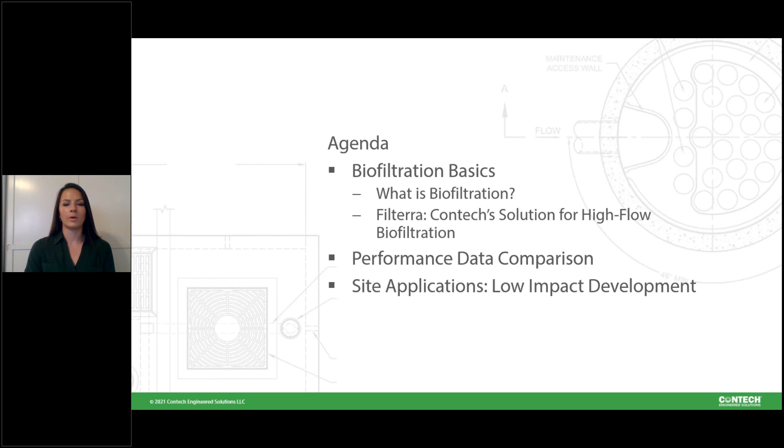So specifically, what is biofiltration and how does Contech's Filterra system fit within the biofiltration niche? After that, Vaikko Allen will take over and discuss the proven performance of Filterra in comparison to traditional biofiltration. And finally, Alex McLeod will finish it off with some Filterra designs that will help you meet your low impact development requirements for your site.

We would like to start off our Filterra webinar with a quick poll question. Please select the term on the right that you think best represents the image on the left.

I'll give you a couple minutes to look at the picture. And then here's our poll. Please select bioretention, biofiltration, rain garden, or bioswale.

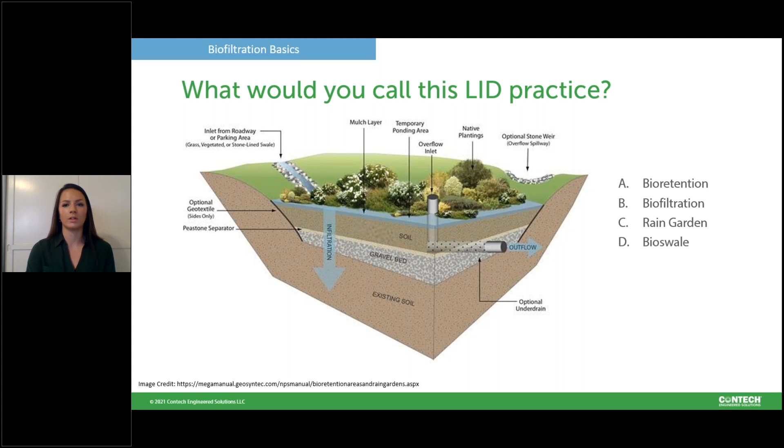Thanks, Jill. So the point we would like to make here is that a lot of these terms are used interchangeably depending on the region you live in. We encourage you to look at your local permits and technical guidance manuals to determine the appropriate terminology for your region. This may be dictated by the absence or presence of an underdrain in the system, but for the sake of this presentation, we will be using a lot of these terms interchangeably and wanted to make that denotation.

So what is a bioretention or a biofiltration gallery? It is a pollutant control mechanism that incorporates physical, biological, and or living processes via vegetation to capture, immobilize, and treat harmful pollutants. Without biological processes provided by the plant, the unit will not be as efficient in nutrient removal and metal uptake and should be termed a media filter, which does not meet the LID requirements of many regions around the country.

To further display where these physical and biological processes occur within the biofilters, we will talk through them step by step during the storm event. Physical filtration first occurs in the mulch layer, which is depicted by number 1 in this diagram.

This is where heavy sediment and debris are captured and retained, and then finer treatment occurs in the media, which is depicted by number 2 in the diagram. Pollutants are trapped through physical impact with the media particle, whereas dissolved pollutants are also captured in the mulch and media through physical and chemical processes.

The chemical makeup of the media allows for adsorption of pollutants, such as phosphorus, in the form of phosphates that are chemically attracted to the soil components via adsorption. Dissolved metals are removed through cation exchange reactions within the mulch and media.

Moving on to the biological processes, the plant introduces a diverse ecosystem to the filtration bed. After the storm subsides, microbes and other organisms housed in and around the plant roots biodegrade various pollutants captured in processes 1 and 2. This is depicted by number 3 in the diagram.

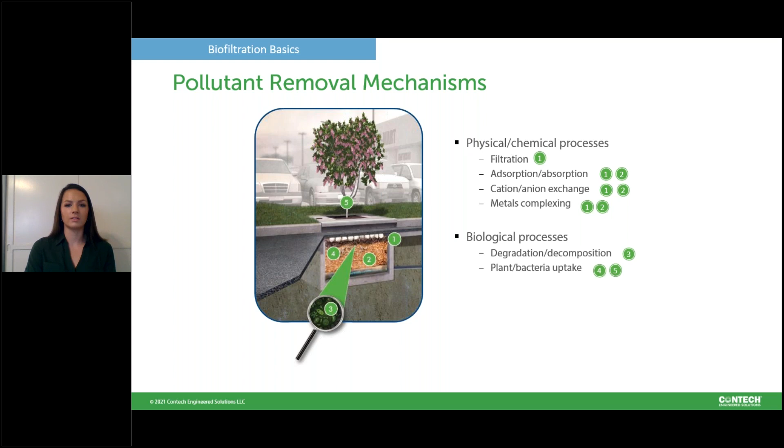Through this process, the pollutants are transformed into soluble forms that the plant can utilize. The act of uptaking these pollutants from the reaction sites in the media opens up that site for use the next time it rains. This renews the media capacity, allowing the plants to use the nutrients for growth and bioaccumulating the heavy metals, as seen in 4 and 5 on the diagram on the left.

Really driving home the importance of vegetation, the plant is crucial to maintenance. The roots keep the pore space open in the media over time and provide long-term shelter, as well as an organic food source for organisms doing the heavy lifting and regenerating the media's capacity.

As the plant grows, the roots facilitate a more robust ecosystem, which provides more uptake, as well as some of the evapotranspiration of the stormwater flowing through the system. It is a symbiotic relationship.

We need the plant to facilitate the biological activity in the media and to renew the media in the system. The plant needs water and nutrients to grow. You cannot have one without the other.

If the system contains no plant, or the plant does not interact with the area of the media through which the stormwater flows, the media regeneration cannot occur.

Likewise, if the stormwater does not reach an elevation in the system for the plant to access it, the plant will not live. If the maintenance of the system is not performed, so in the case of Filterra, the removal and replacement of the media, the system will be in bypass and the water will not reach the plant.

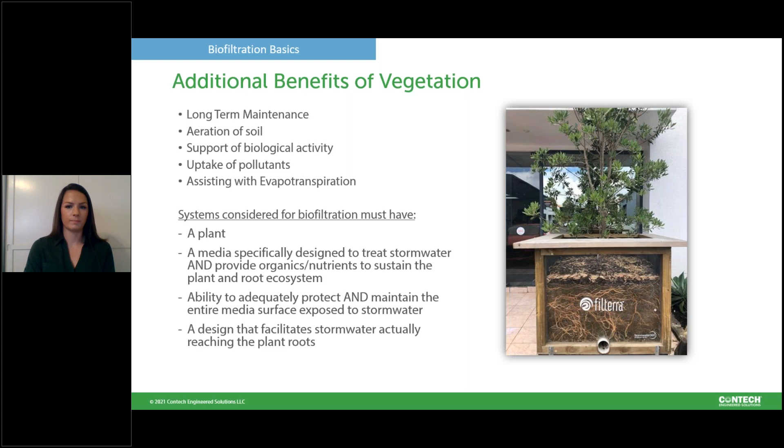So in addition to the plant, what makes up conventional bioretention? Its media typically flows at 1 to 12 inches per hour, depending on your local jurisdiction or requirements. It can take up a decent portion of the drainage area for your site, and it's typically designed by an engineer, sourced and installed by the contractor, and maintained by the landscaping crew.

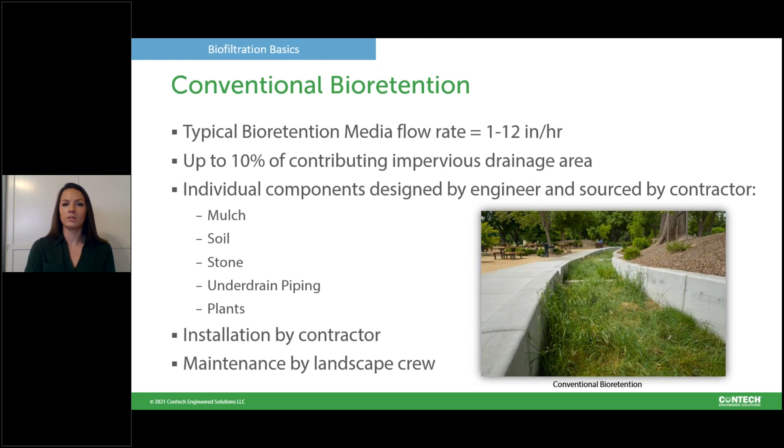Its basic components are mulch, soil, stone, under-drain piping, and plants. But how does Filterra bioretention differ from that of conventional bioretention? You still have the plant, mulch, media, stone, and underdrain.

However, our soil is a proprietary media that's been engineered to flow at 100 to 175 inches per hour. What media infiltration rate we use will depend on the local jurisdiction the product is being installed at.

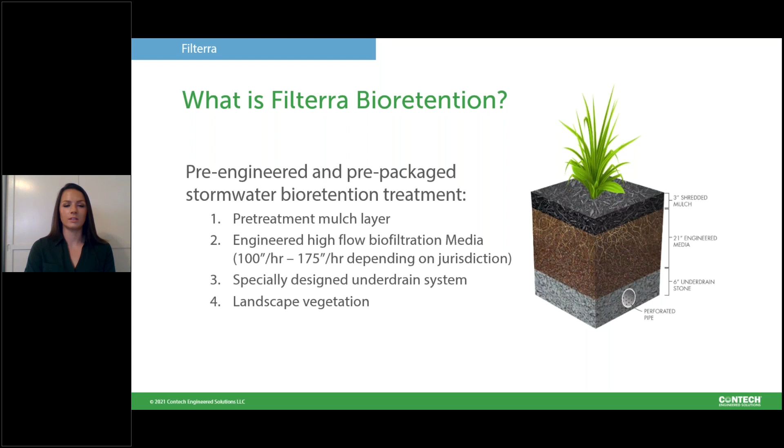Due to this higher media infiltration rate, the Filterra has a much smaller footprint than that of conventional biofiltration. This frees up a lot more usable land on site, which can be a game changer on sites where the cost of land is steep, like California.

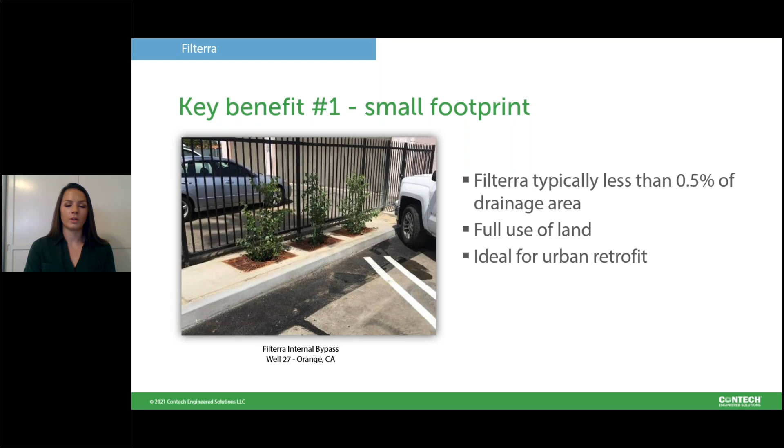There's a lot of versatility to our units to accommodate fitting them in any site. Our most basic and cost-effective design is our offline unit. This can have a curb or a pipe inlet and requires the use of a diversion structure.

If you cannot accommodate the use of a diversion structure, we would recommend using one of our internal bypass curb models or the peak diversion. The peak diversion are for those sites with a slightly higher peak storm event because it has an inlet chamber and an outlet chamber separated by an internal weir wall to increase the capacity of that internal bypass.

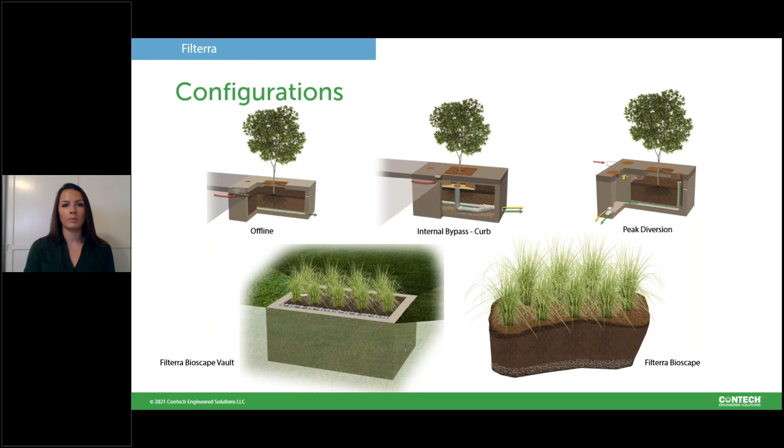If the owner or architect is looking for a more aesthetic option, we do have the Bioscape Vault. This still has a precast in place, however, it's open top, so it's a little more pleasing to the eye. If no precast is desired whatsoever, you can pursue the Filterra Bioscape, which is essentially a Filterra in a lined trench. This unit is ideal for those areas that need multiple vaults or just a large media surface area. Both of our Bioscape vaults also have internal bypass capacity.

Another benefit of the Filterra system is that you're getting a prepackaged design that just needs to be set and backfilled by the contractor for our typical vaults. Our media batches are rigorously tested and quality controlled to keep performance consistent versus media mixed on site by a contractor to meet an engineer spec.

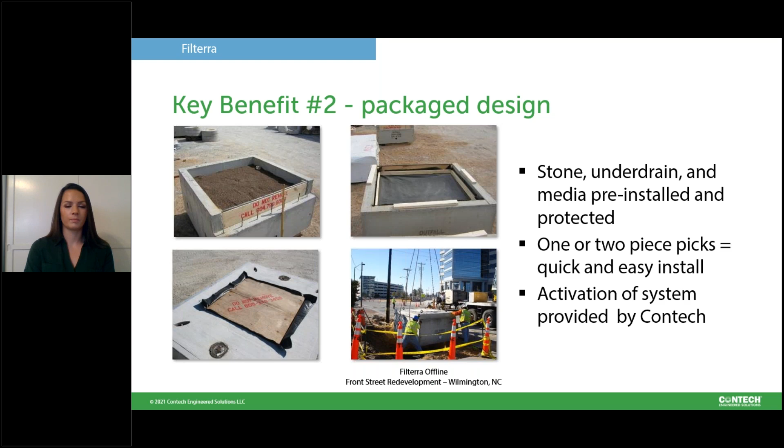Once the site is 90% stabilized, they can call the number boarded up on the Filterra to complete the activation. At the time of the activation, you'll receive your first maintenance event. The first year of maintenance is included with our Filterra system. At this time, they'll ensure the proper installation of the tree. So we want to make sure that a lot of the soil from the plant's root ball isn't mixing in too much with our proprietary media. And we'll also place the top 3 inches of mulch and replace the tree grate.

A secondary visit is performed about 6 months after that to check on the livelihood of the plant. We want to make sure that it is either being irrigated in dry areas or that it's seeing enough stormwater to help it thrive. At that time, we will remove any trash, debris, and the 3 inches of mulch and replace the 3 inches of mulch on top.

After the first year, the unit should still be maintained every 6 months. The mulch can be sourced locally per our mulch spec, and there is no confined space entry needed to maintain our units. So virtually anybody should be able to do these. However, if the owner so wishes to, they can go on our website and get a quote from any of our third-party certified maintenance providers in their area.

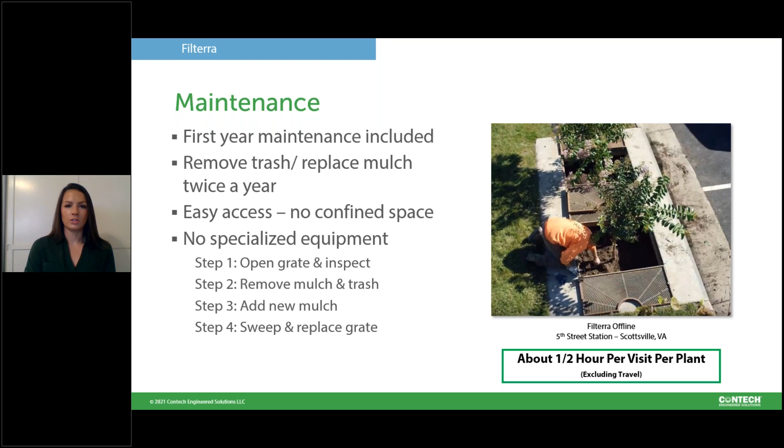I will now be handing over the presentation to Vaikko Allen to start our discussion on key benefit number 3 of the Filterra, which is its proven performance.

And while we're switching presenters, we've had a couple great questions come in, so I'll just ask them now. The first one is, can you place Filterra in a raised planter? The Filterras can be placed above ground. They just require an additional structural calculation. Thank you. And then one more question. Do you need to replace the media when you replace the mulch during maintenance?

Yeah, so piggybacking on the last one, you can also put a Bioscape in a raised planter as long as it meets our certain requirements. And we actually have our media tested out 15 to 20 years, and it should not need to be replaced if the mulch is adequately and properly changed every 6 months to prevent any occlusion within the media.

Great, thanks Tamara. Vaikko, take it away. Great, thank you.

Good morning, everyone. So yeah, we're going to talk about performance here for a few slides. It's been over 15 years since Filterra was initially conceived in a laboratory, and we've been testing it really since then, both in the lab and in the field. At this point, we have 6 independently verified full-scale field studies. And the purpose of those studies is mainly to evaluate the water quality performance of these systems.

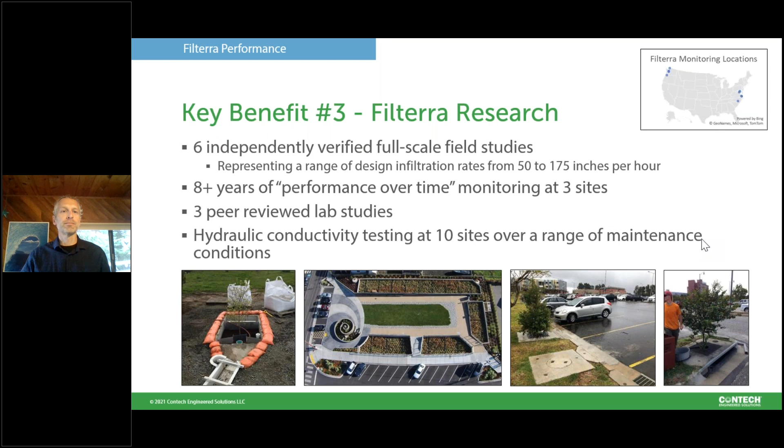So at this point, the premier field monitoring protocol is the Washington Department of Ecology TAPE program. They've established a technology assessment protocol, Ecology, otherwise known as TAPE, which is really a guide for evaluation of stormwater treatment systems in the field. And the Washington Department of Ecology has set up some very specific performance standards that must be met in order for treatment systems to be used in that state.

And if systems are tested following the protocol and meet those standards, then the ultimate goal or endpoint of the program is to get a general use level designation for the technology in the state for the specific pollutants. There are pilot and conditional use level designations available as well for technologies that maybe have a little bit of lab data or a little bit of field data, but haven't quite followed the TAPE requirements.

So I bring that up just because I want to reinforce that it's important to look for general use level designations from the Washington Department of Ecology to really indicate that a technology has made it all the way through the testing process and has been approved.

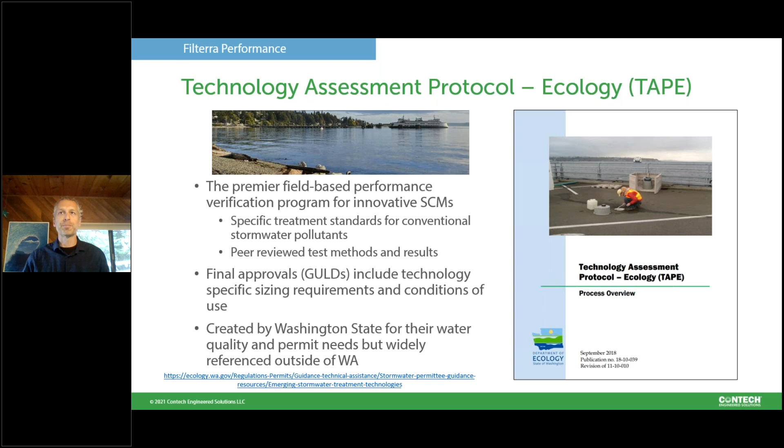For example, for TSS, we're looking at basically between 20 and 200 milligrams per liter. The reason that those are set is so that the data that's collected is relatively representative of typical stormwater conditions. So in other words, we don't want to, for TSS, for example, be sampling water that's 1,000 or 2,000 milligrams per liter coming in, because that just is kind of an outlier or in the very high upper range of what you might expect for TSS concentrations. And it's actually much easier usually to get high removal efficiencies. So these influent concentrations are somewhat constrained to focus the research into typical conditions.

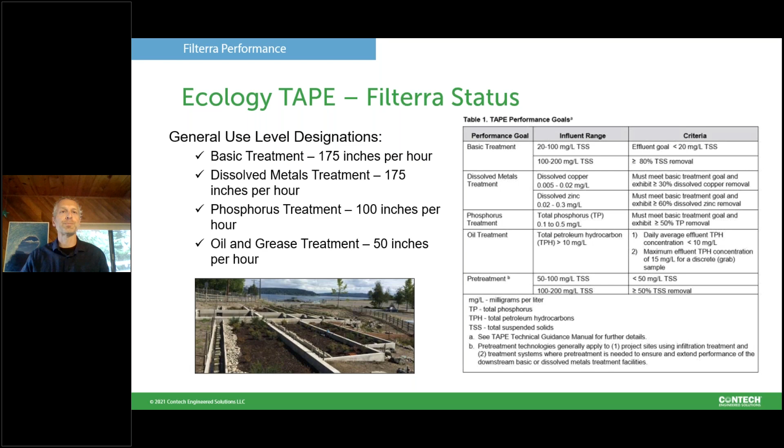In the laboratory, the premier testing program is the New Jersey Department of Environmental Protection. Here they have a lab-based testing protocol that requires the use of a manufactured silica product with an average particle diameter of 75 microns, and 80% of those particles by mass are greater than 8 microns. So the implication or the assumption here is that if you're able to remove 80% of this TSS sample in the lab setting, then you're probably removing particles that are about 8 microns and larger.

Now, this program is actually run as a partnership between NJCAT and NJDEP. So NJCAT is the New Jersey Corporation for Advanced Technology. They essentially are a verification body. So they will look at the testing that is conducted, and they will verify whether or not it meets the protocol that was set out for the test, and they will verify whether or not the test data that was collected is accurate. And NJDEP will then certify the technology if the testing protocol that was used is their laboratory testing protocol, and if the performance meets their goal of 80% TSS removal.

Now, it's important to note that NJCAT will also verify test results that are collected from other protocols. So you may see some stormwater technologies that have NJCAT verification reports, but not NJDEP certifications for those same tests because they were conducted under a different protocol. So just be aware of that. So the Filterra has been through the NJDEP program.

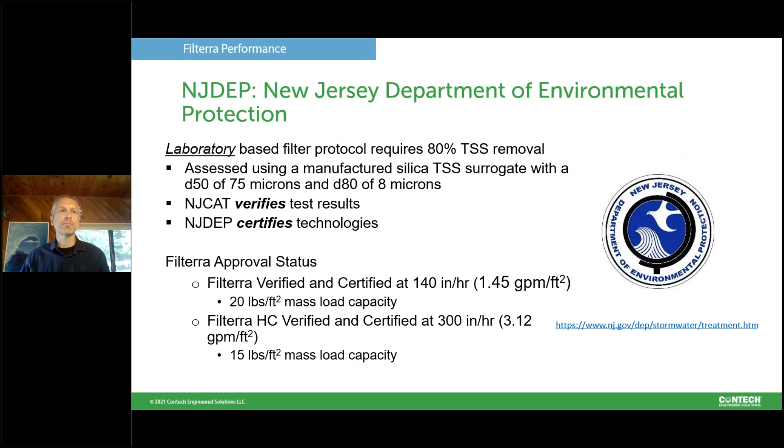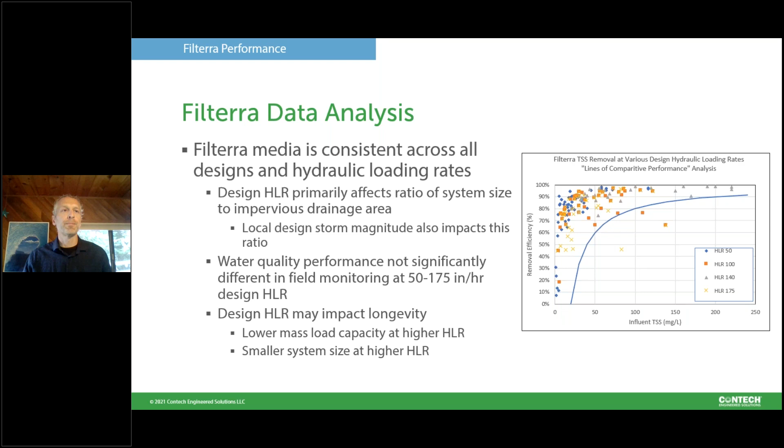Another way to look at data comes from the International Stormwater BMP Database. And if you haven't checked out this report already, I would definitely encourage you to. It came out at the end of 2020, and it gives summary statistics for a number of different treatment systems and most pollutants that you might be interested in removing for stormwater.

Previously, they had lumped all manufactured devices together into one category, which literally included everything from Filterra to catch basin inserts. Now they've broken them out. So we have high rate biofiltration as a separate category. And it turns out that all the high rate biofiltration data is Filterra data. So there are 6 studies that are entered into the BMP database. They've also broken out bioretention into finer categories, with grass swale and grass strip as separate categories as well.

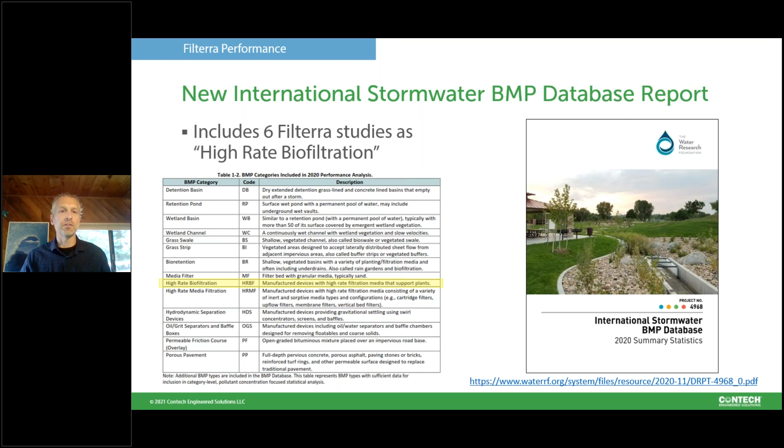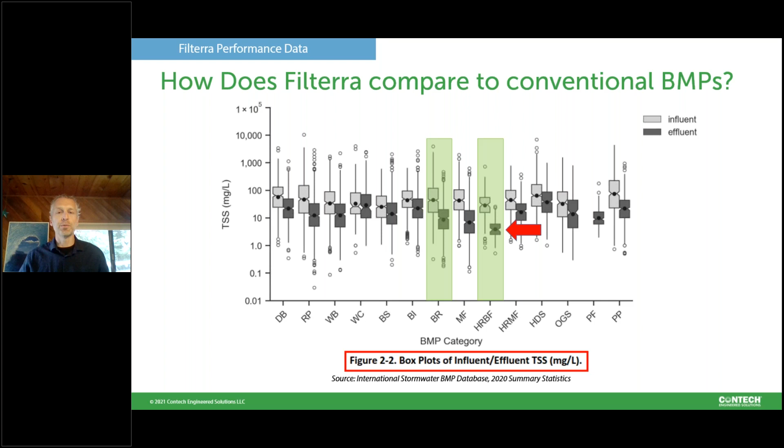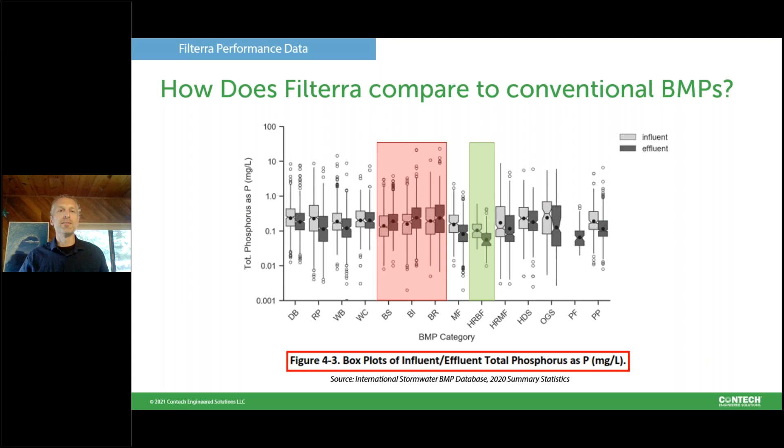Now, the reason for this is that many systems are using compost, or even some of the topsoil blends that are used have leachable nutrients in them. And when we're sending water through, especially in the first few years of operation, oftentimes the effluent concentration is actually higher than the influent concentration. We don't have that same issue with Filterra, really on purpose. We chose to not use compost or other organic amendments that have leachable qualities. So that's where performance really starts to diverge. I'm not going to go through all the other plots, but I would encourage you to go back and look at that report; it's quite fascinating.

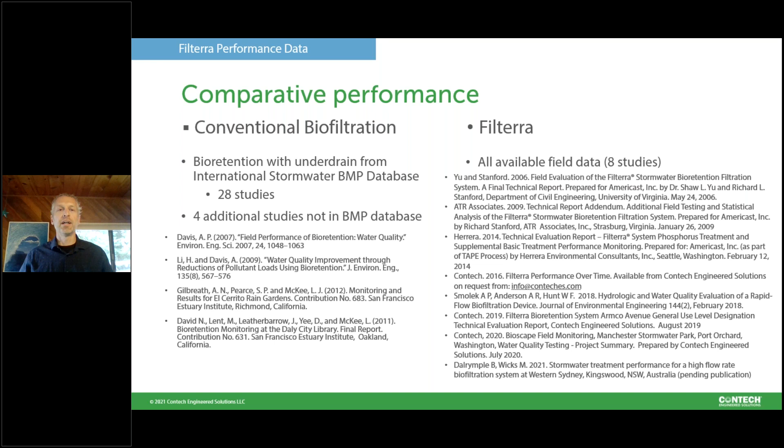Another way we're going to look at data here for a few minutes is moving window bootstrap plots. That's kind of a mouthful, and you'll see what I mean in the next slide. But before that, I wanted to at least throw up this slide, and you can follow up afterwards and look at the data sources we're using. We're literally taking all the Filterra data that we have and putting it in these graphs, and we're querying the International BMP database to get all of the bioretention with underdrain studies from it. We've also added 4 additional studies that are not in the BMP database, but that are of systems of a similar design and proportion relative to the drainage area that are typical in most places.

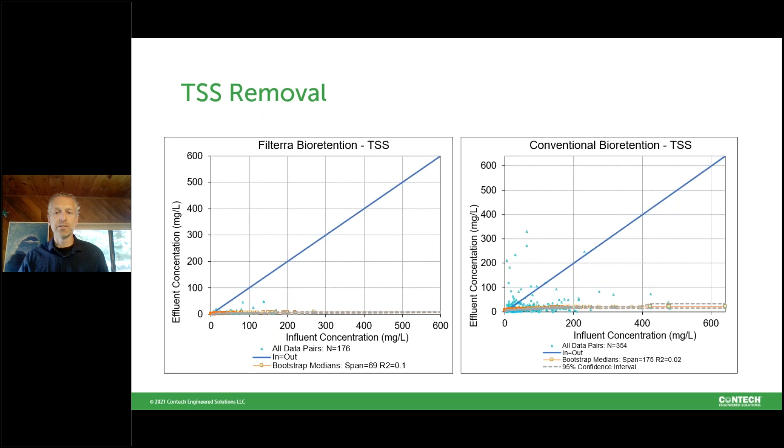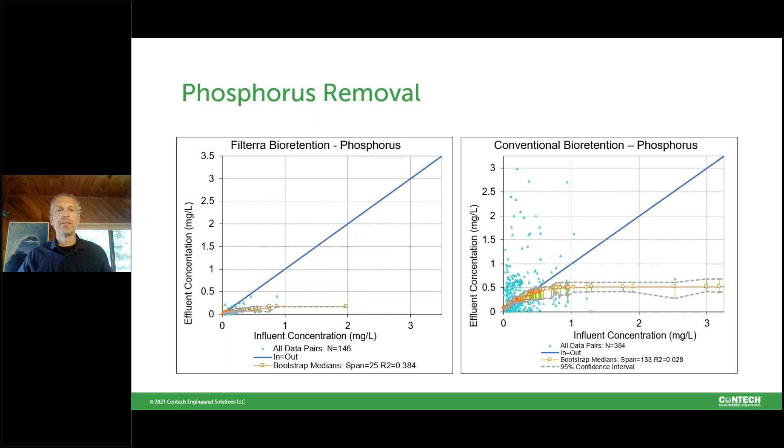We're going through these kind of fast, but these are really a stand-back-and-squint type of chart, where you can get a feel for the trends pretty quickly.

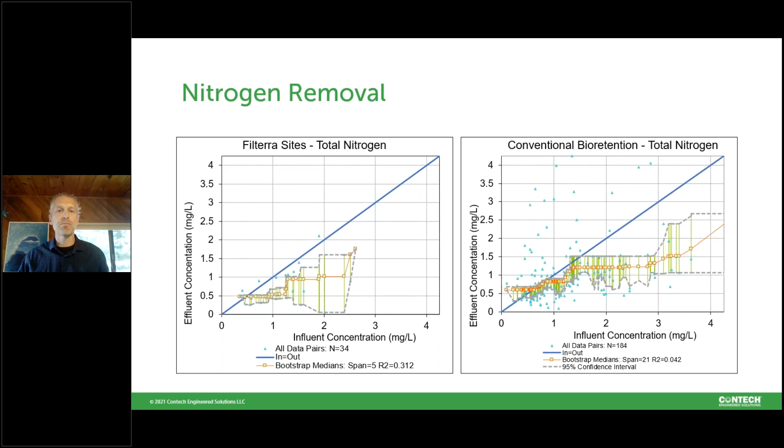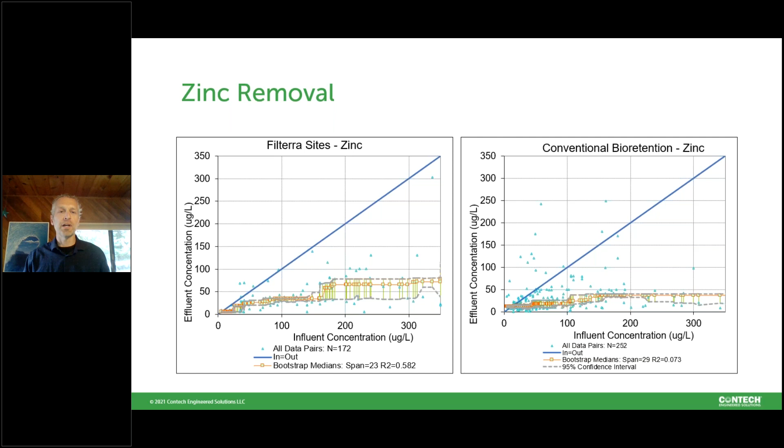Shifting now to metals, we'll look at zinc first and then copper. For both systems, they're pretty good at zinc removal — we're looking at micrograms per liter instead of milligrams per liter now. As concentrations get up in the 100 to 200 range, we're seeing significant removal, in the 60, 70, 80, 90% range, and effluent concentrations are quite low as well, in that 50 microgram per liter range. A little better here for conventional bioretention on average, although if you plotted the confidence limits on the same graph, you'd see they're overlapping.

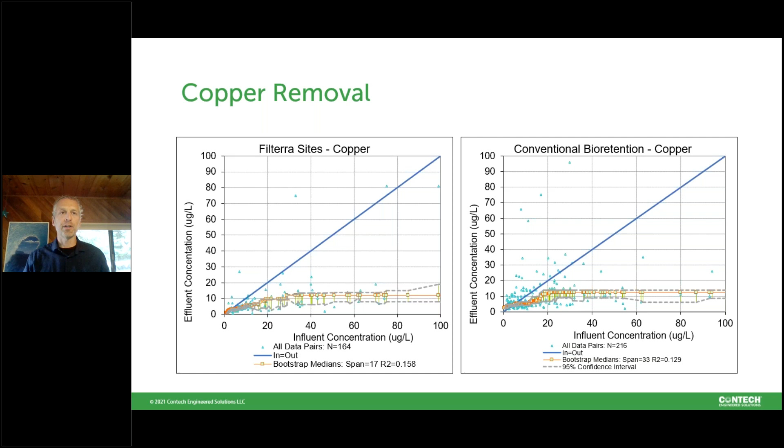So I hope you've enjoyed that really rapid cruise through the test data. One question we often get is, how can you pull off such high removal efficiencies at such a high hydraulic loading rate, compared to the 1 to 12 or so inch per hour rates we're seeing with conventional systems?

Well, the answer is really first by design and by engineering. Our media is created to limit or eliminate the possibility of leachable nutrient concentrations. We also have a slightly coarser media than a lot of conventional medias, but the real answer is the quality control aspect. We run over 20 tests on the different component parts of our media, and when we blend it together we also test that media. In both cases, we have performance specifications and physical specifications that must be met — measuring things like hydraulic capacity as well as physical characteristics like particle size distribution. So all of our media is identifiable by batch and traceable back to the components that make it up.

So if we ever have an issue, we can go back and identify where it came from and correct it. We've been doing this a long time, 15, 20 years now. So we have our media production and QC processes down extremely tight. That's how we're able to consistently get these high flow rates.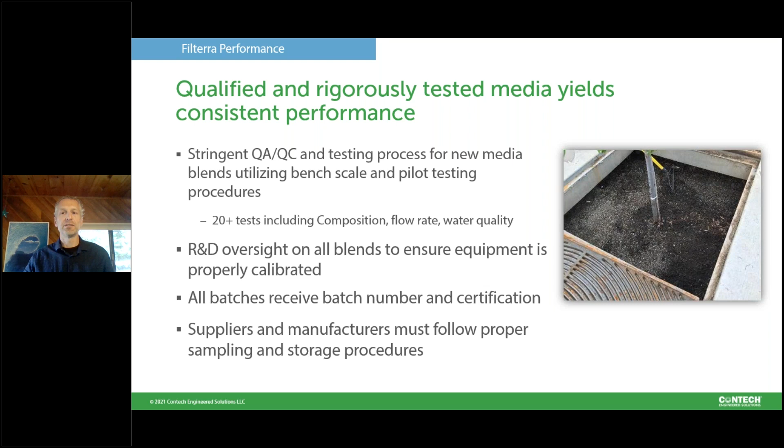The other question we often get after going through all the performance data is, how does this fit into a low impact development application, where maybe runoff reduction and volume control is also part of the equation? To talk about that, I'm going to shift over to Alex McLeod. Thank you.

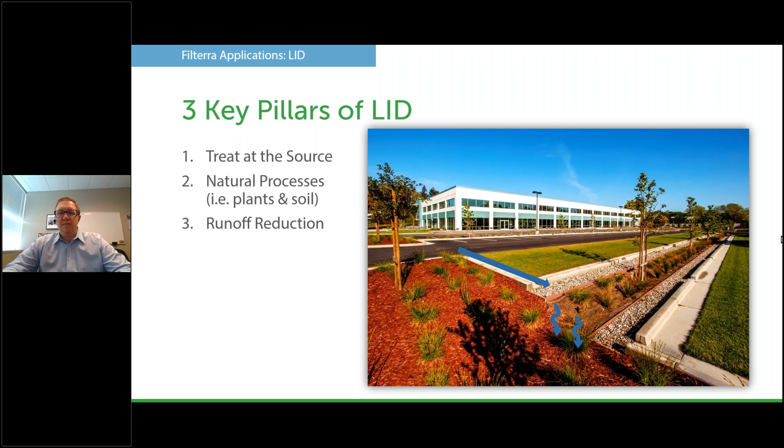In this first example from Toledo, Ohio, the designers were interested in implementing LID practices throughout the site. They also wanted to improve aesthetics. Additionally, since this was a renewal of an older hospital site, there was a lot of old existing infrastructure that needed to be tied into, so space and depth was extremely limited.

The designers elected to use Filterra due to both its shallow design and the LID treatment benefits it provides. They liked the idea of being able to use an innovative planted system that aligned with the other landscaping on the site. To meet the LID goals, they used 12 different Filterra systems scattered throughout the project that provided the decentralized direct treatment at the source the LID guidance prefers.

This slide shows an example plan layout showing several decentralized Filterra units treating a large parking lot. The offline configuration shown here incorporates a standard catch basin downstream of each system for bypass. Tamara got into the details on this type of configuration a little bit earlier in the slideshow. Not only is this the most cost-effective Filterra configuration, but it is also ideal for retrofits, since the existing catch basins and infrastructure in many cases can remain in place and not have to be disrupted.

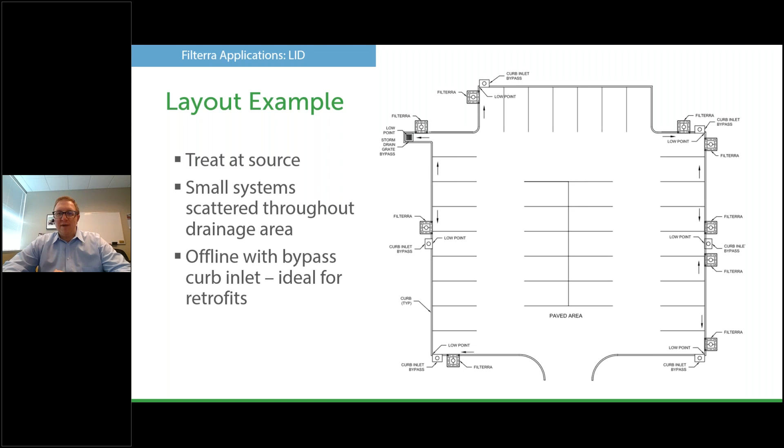For the next few case studies, I really like to focus on how we can combine Filterra with other runoff reduction and volume control practices to help you achieve your LID goals.

The Campus Walk project shown here, located in Virginia, combines a permeable pavement with Filterra. Permeable pavements do a great job of infiltrating water, but they don't really do a whole lot for treatment of pollutants and debris. Many times these pollutants remain on the surface and ultimately end up flowing downstream. Utilizing the Filterra as an intermediate step between the pavement and the bypass allows these pollutants to be captured.

On the Robertson Ranch project shown here, the developer actually approached us. This is a large high-end home community in Southern California. The site had originally been designed with several above-ground infiltration basins scattered throughout the neighborhood. The developer was very concerned about aesthetics and really standing water potentially reducing the value of some of the homes located near the systems.

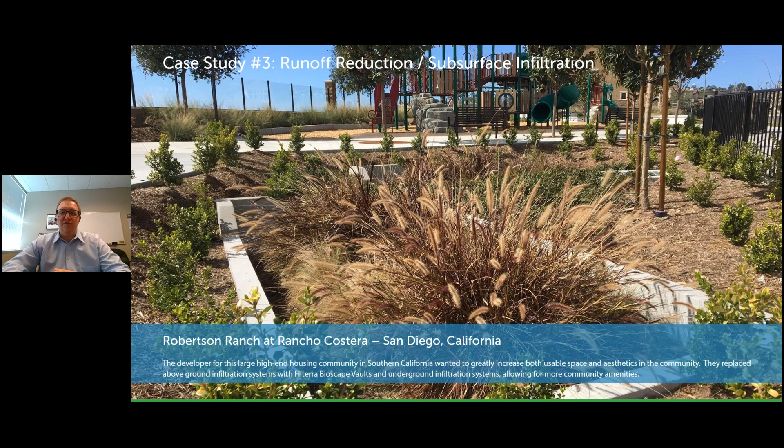Infiltration was then provided downstream using underground detention solutions. This allowed the remaining land surface areas around the systems to be utilized for value-added amenities, in this case the playground you see in the background of the photo. Out of the 22 systems installed on this project back in 2017, the developer got opportunities to implement different amenities on site, including walking trails, benches, and numerous other features.

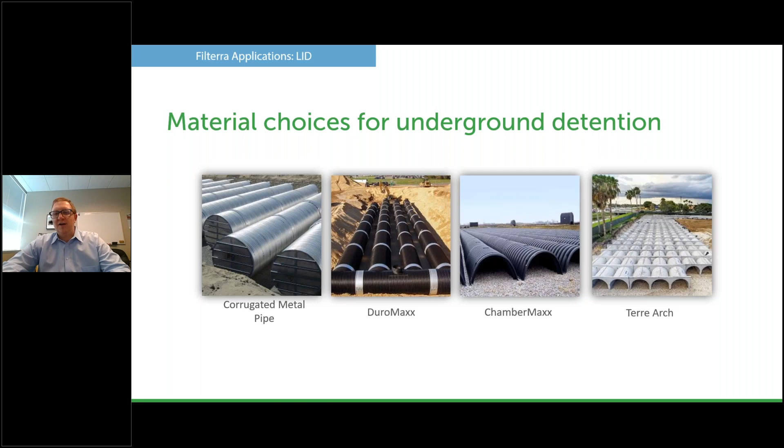I'd like to spend a little time talking about the options Contech can help you with when considering downstream underground infiltration paired with the Filterra system. Contech provides several different products for this application: one, our corrugated metal pipe detention systems; two, our DuroMaxx detention systems, our highly durable steel reinforced polyethylene pipe; three, our ChamberMaxx product, very applicable for smaller, low cover designs; and finally, our concrete arch detention system, Terre Arch.

In this example layout showing this type of design, you can see a peak diversion Filterra collecting runoff from both the curb and an inlet pipe, combined with a small ChamberMaxx system to meet the runoff reduction requirements. With a Filterra drainage area typically between 1/4 and 1 acre, you only need a few ChamberMaxx chambers to meet the runoff reduction volumes. Installation ends up being very quick and easy, usually done at the same time as the Filterra installation. Again, utilizing an underground system like this allows you to get all that surface land back for other uses.

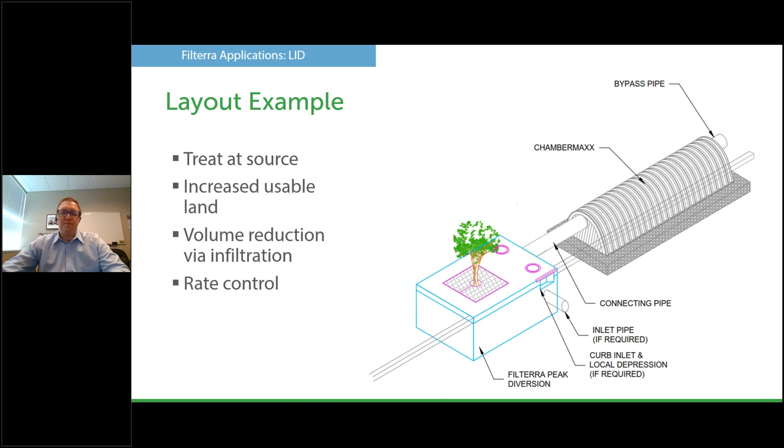In our last case study here, looking at the combination of Filterra with volume control and other runoff reduction practices, I'd like to talk about the Cross Stone Commons project in Middletown, Maryland. On this project, several Filterra Bioscape systems were integrated within larger storage basins, as you can see in the photo. The Filterra is in the foreground, installed within a much larger grassed basin. Filterra Bioscape is another variant of the open-top Filterra, but it doesn't include a vault. It can be installed directly into the ground or really any other site-constructed container.

Originally for this project, the entire basin, comprising the Filterra and the grassed area, was designed as a traditional bioretention system. Redesigning this with Filterra allowed for a substantially smaller maintenance footprint because the area behind the Filterra really only requires mowing. Since the Filterra Bioscape is typically designed without any barriers at the bottom, this entire basin, including the Filterra area, can also infiltrate, providing an additional benefit in meeting runoff reduction requirements.

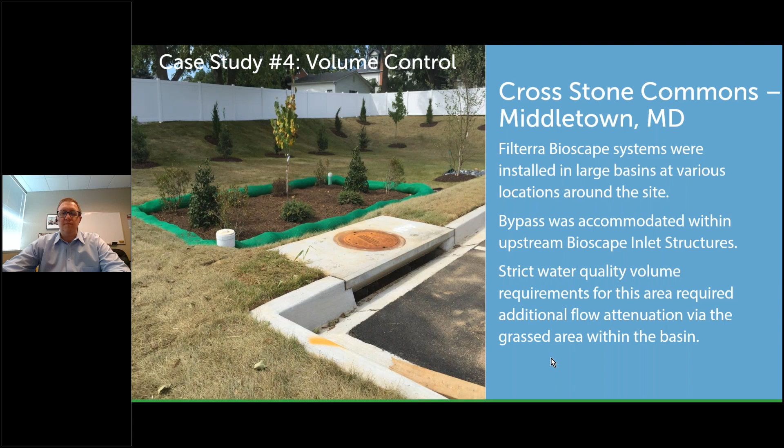The example layout on this next slide illustrates this type of design. It shows a precast Filterra, but as you saw in the prior case study, this can also be applied to Filterra Bioscape or any other configuration of Filterra. Volume storage can be combined upstream or downstream of the Filterra system, as you've seen in previous slides, and you can utilize both traditional basins as well as manufactured detention and retention products, depending on your local requirements or site constraints. We can help you with configuring the proper layout, elevations, and any other layout constraints you may be dealing with when orienting the Filterra with one of these types of systems.

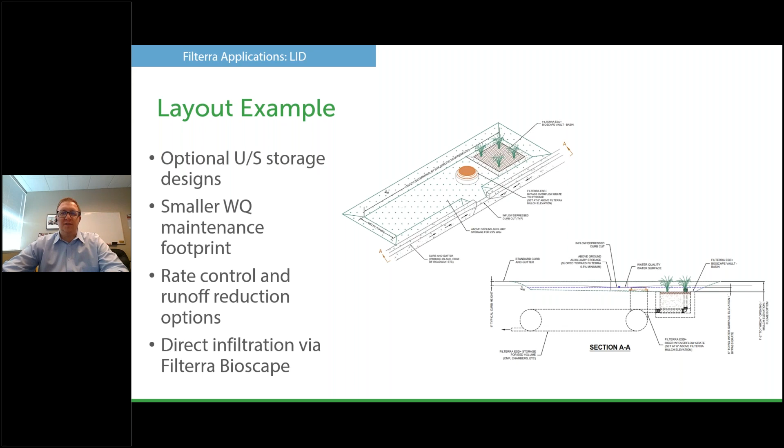In our last case study, Riverwatch on the James, I'd like to focus on tree cover. Aesthetics is a concern in stormwater, especially where LID is a focus, because it draws positive attention to the system and contributes to knowing how well the system is functioning. If the plants are healthy, that's a good indicator that stormwater is flowing properly through the system. On the other hand, unhealthy vegetation can indicate problems like lack of maintenance, clogging, or improper design, in other words, water not reaching the biofiltration component of the system.

Tree cover is becoming a big part of meeting LID goals. It improves site aesthetics, reduces the heat island effect, and established bigger trees provide the largest potential for evapotranspiration, which is one factor in runoff reduction. Plants are a critical part of treating stormwater in a biofiltration system like Filterra. Therefore, we provide several different options with the Filterra system to allow for the use of larger street trees up to 60 feet in mature height with our street tree Filterra configuration. This is in comparison to the 20 to 30 foot maximum mature tree height in our standard Filterra units.

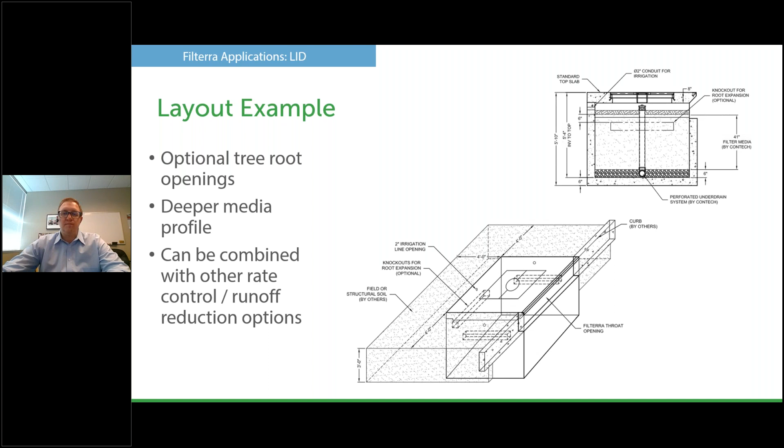I'd like to thank everybody for your time today. We hope this webinar has given you a clearer picture of how you can be confident in incorporating high-flow bioretention solutions into your LID designs.